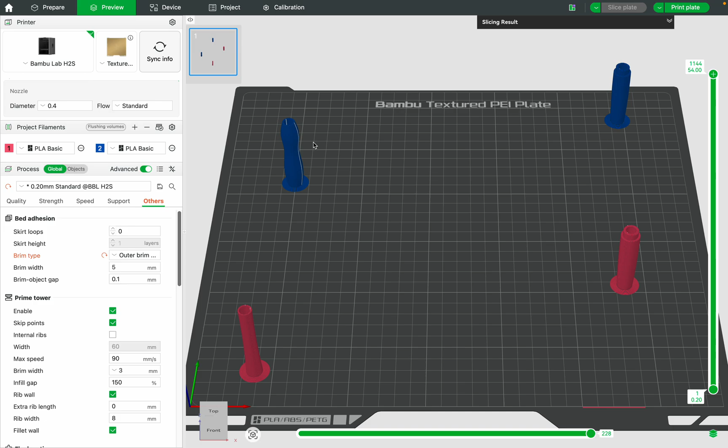That's part of the reason why we've staggered these pieces the way we have. So let's start over and show you how we do this. We're going to go to prepare, and I'm going to start a new project.

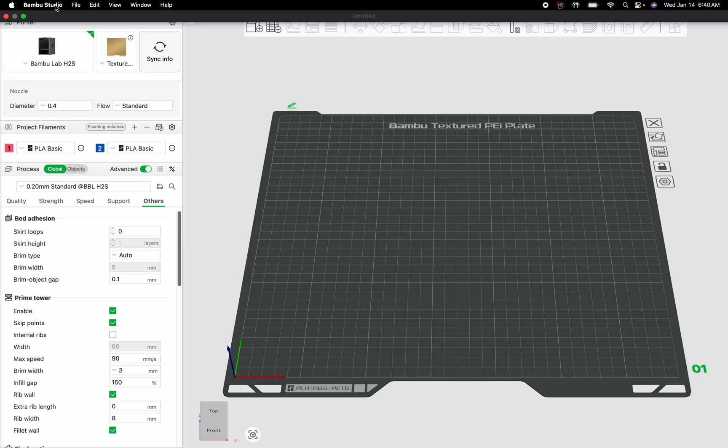The first thing I want to do is bring in my pen parts as well as the pen parts of my partner. I'm going to hit Control I or Command I on the Mac, or go to File and import your geometry. So I have these two grip shells, and then the clip shell I'm going to bring in. So open up.

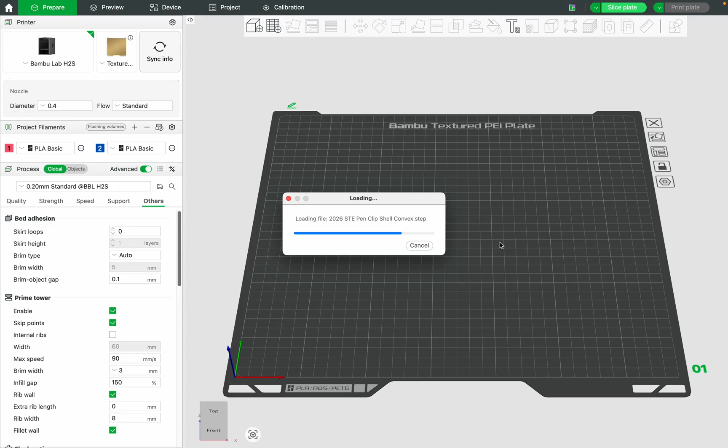Now, if you bring in all of the parts at the same time, it's going to ask you eventually, do you want them to be one part file, one combined object all treated as one thing on the build plate? The answer for that question is no. I don't want to load these as a single object. I want to load them as multiple parts. So I'm going to hit no on that one.

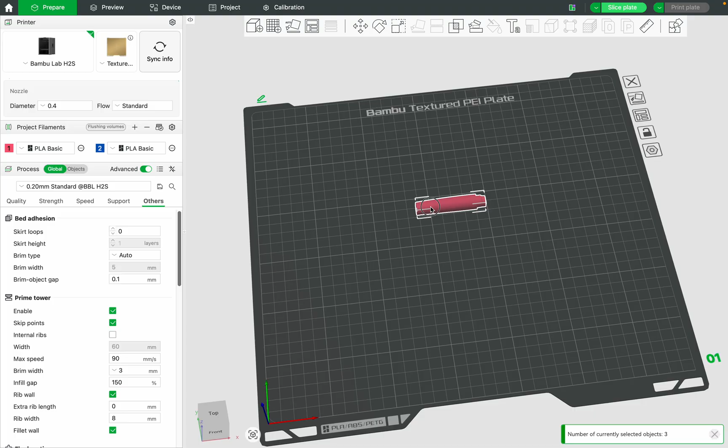When they come in, they're all going to be stacked over each other. So there's a couple different things I can do. I can click off to deselect, or hit escape on my keyboard to deselect. Then grab one, drag it, grab the next one, drag it, grab the next one, drag it.

Now I want a duplicate of this one because for the pen, I'm going to use this same piece. So I'm going to copy and paste, Control C, Control V, if you're not familiar. So here's my four pen parts.

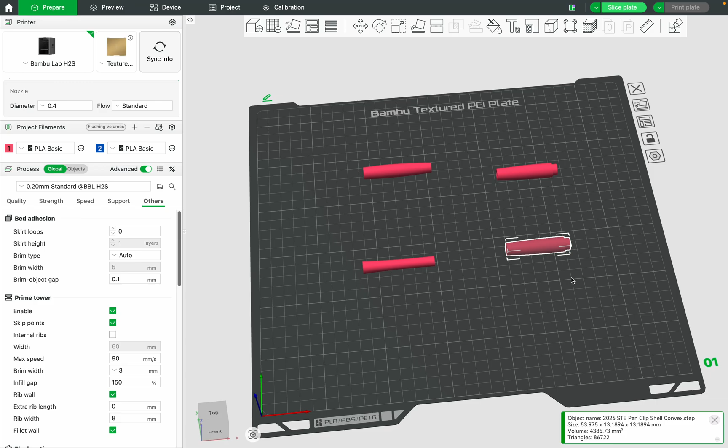I have two different colors established. If you don't have two different colors established, you can hit the plus symbol to add an additional color. I'm working with pink and blue in this case. So I'm going to have one pink pen and one blue pen.

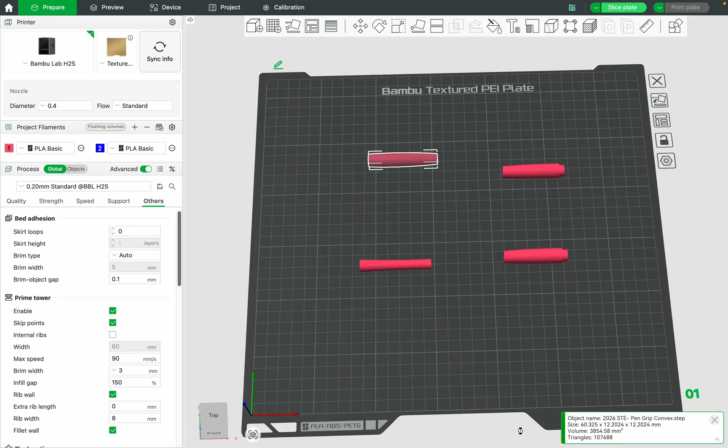I'm going to right click on this back piece, go down to where it says change filament, and change that to blue. I'm going to select this one, right click, and change this one to blue as well. You pick whichever colors you and your partner want for when you run your print.

Ultimately, what this is going to do is allow us to run two pens in a single print job, which is a good thing. So now what I'm going to do is go ahead and reorient these.

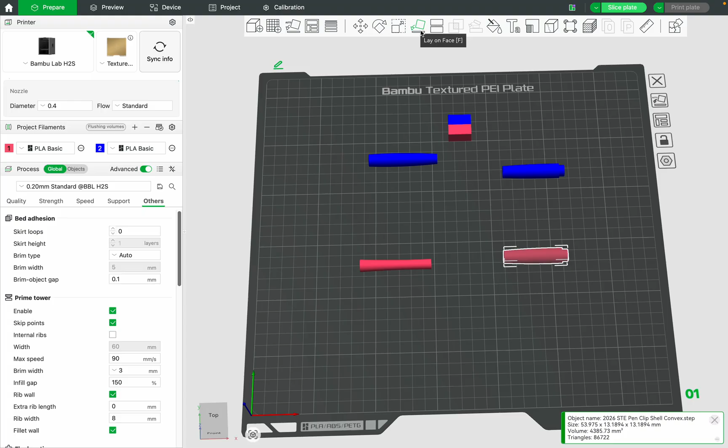I'm going to select my first one and go to lay on face. F on the keyboard is the shortcut for this. Then I'll rotate this around, put that one up on end. I'm going to grab this one, put that on end, grab this one, put that on end, grab this one and put that on end.

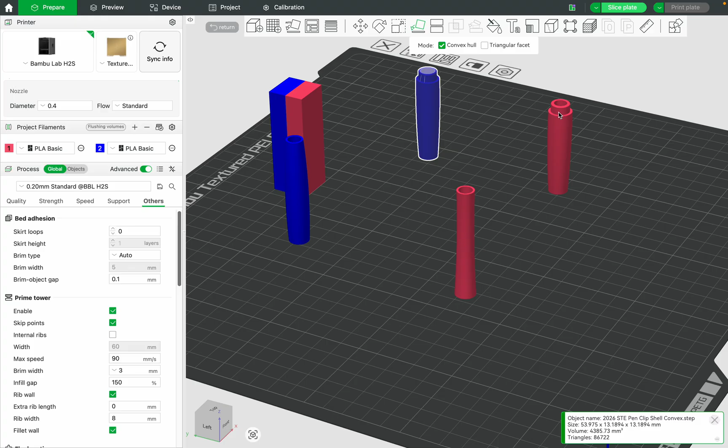By orienting it the way I have, you'll see the tenon is up at the top. This means by putting that up at the top, I won't require any supports, and that is a good thing. So I'll rotate this back around.

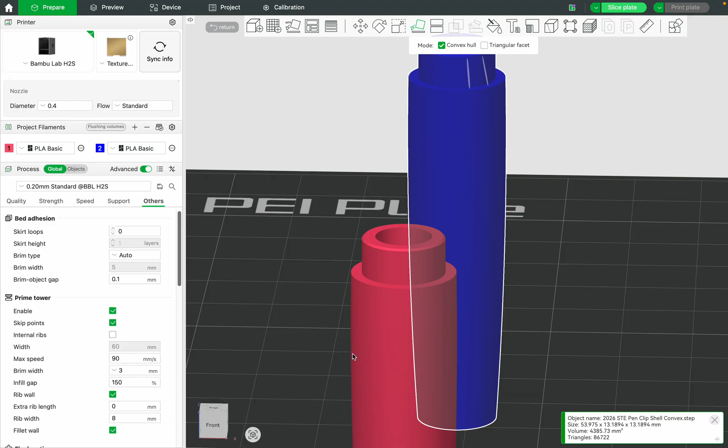If I want to get back to fitting one part in the zoom, I can click on that to do that. If I go to my front, I can get to my different orientations by rotating the cube around here. But my favorite thing to do is hit Control 1 on the keyboard, which gives me the top-down look. So I'll zoom out by scrolling back.

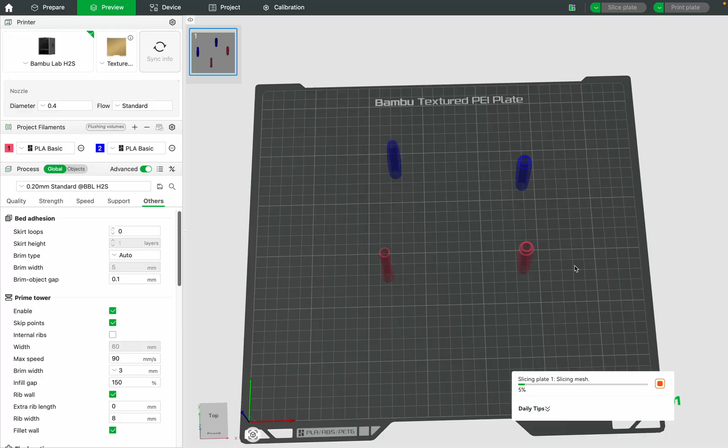So now that I got my pieces on here, they're set up to print by layer. If I go ahead and slice this whole plate, it's going to print these by layer, and that's not what I want. You can see it's trying to print all at the same time. If we look at the amount of time it's going to take, you can see it's going to take 9 hours and 4 minutes, and that is not what we want at all.

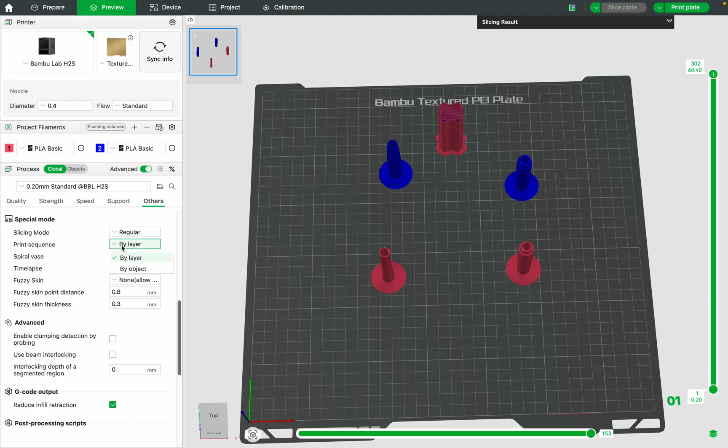So what I'm going to do instead is come into our print settings, go to other, and go down to where it says print sequence. Instead of printing by layer, I'm going to print by object. Now when I do this, I'm going to get some errors, and you'll see why in a second.

So print by object says wait a minute, these things are too close together. Let's go back to our preview, and you'll notice we get these circles. These circles give us two things: one, they give us a warning if things are too close together. These circles are overlapping, so that means I need to move this and get it out of there. But two, I'm also getting an error saying it's too tall, it's going to collide.

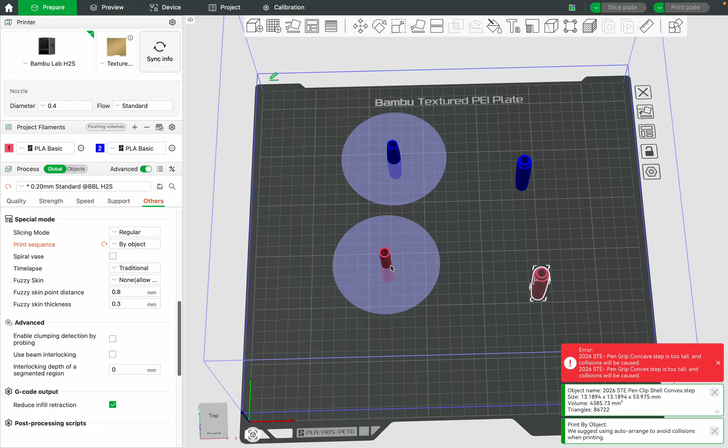So in order to take care of this error, I need to stagger my parts. I'm going to put one way up here in the front, and I've got this one staggered just beyond it. I'm going to put this one over here, and then this one back here in the back. Now it says I still have a collision warning, so I'll move this back, move this back, move this back, and see what I got.

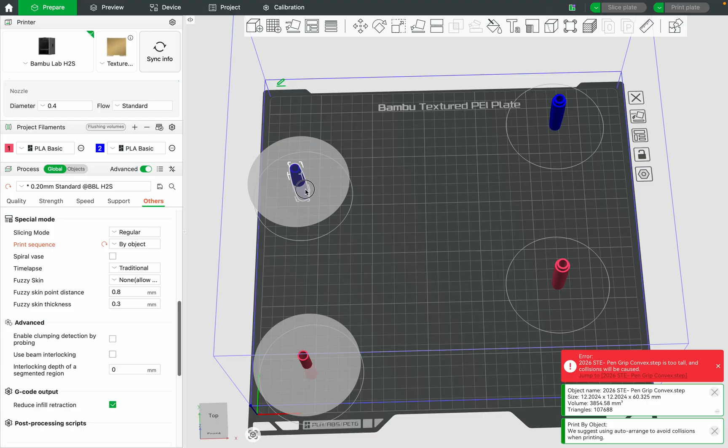Oh, I have a collision warning on that one, so I'll move that one up. Notice my collision warning just went away. So that means I have no more errors to worry about, and I should be in good shape to set this up to print.

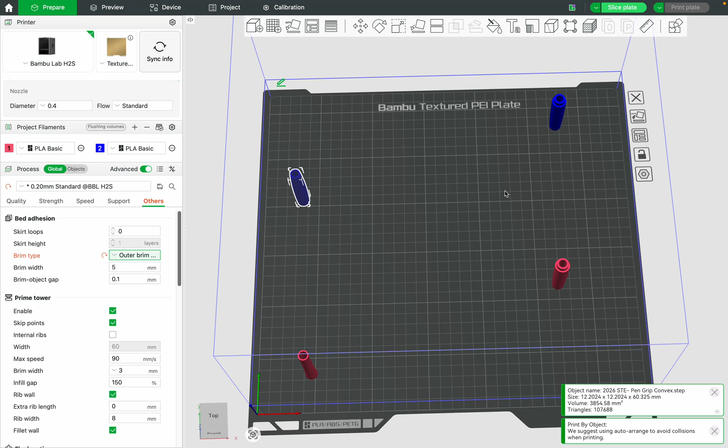Other things I want to do: I want to go in here and add a brim, so I'll add brim on outer brim only. What that's going to do is put a little pad of material around these so they're less likely to fall over as I'm printing. So now I'm going to hit slice plate, and what you're going to see is...

When I scrub through my preview, it's going to print one at a time. So the question is, which order is it printing? Well, right now it's printing that one first, and then it's printing that one. If I keep going, you can see now it's switched to the back, it's printing that one, and now it's printing that one. Well, I really don't want to print in that order.

So how do I change the order? Well, if I go over here in my process and switch from global to objects, I can see the order on the plate. So if I click on one of these, let's click on this one here - all right, so that's my pen grip.

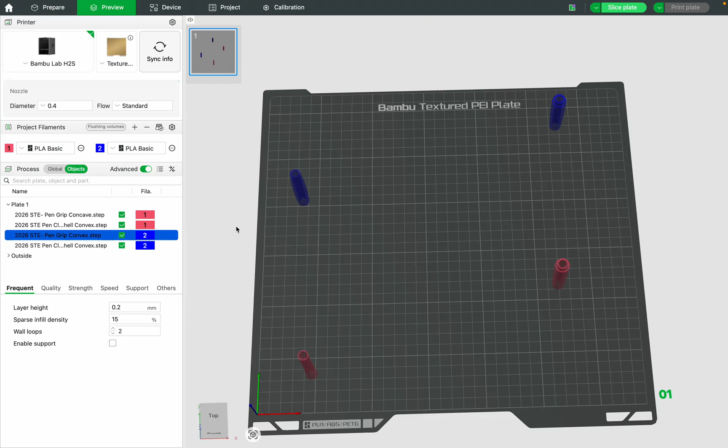I'm going to move this to the top of my stack. Then after that, the next one I want is going to be the next pink one, so I'll grab this and put it right underneath that. Next after that is going to be this pen grip here, which is right after it, which is good. And then last is going to be this one right here. So if I did that right, I'm going to have to reslice.

By changing that stacking order, what you're going to notice is hopefully it's going to print - yep, so it's printing the front one first, then it's printing the second row, then the third row, and now it's printing the back row.

So not only that, but if you recall before, it was going to take hours and hours. Because I'm printing by piece, it's only going to take an hour and a half. So I shaved a ton of time off this print job because it doesn't have to switch colors on every layer. And the nice thing is when it finishes this one and starts printing those, I could potentially pause the machine and just go pull these off. So halfway through my job, the first one's done, and the second one will be done thereafter.

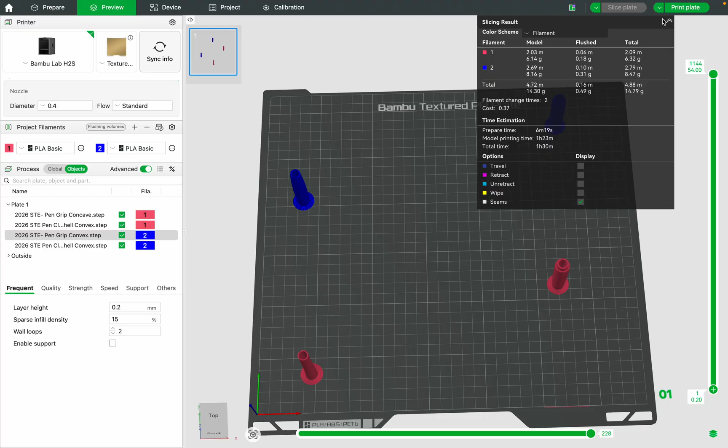So that's how we set it up to print by object, and we have to watch out for the warnings.